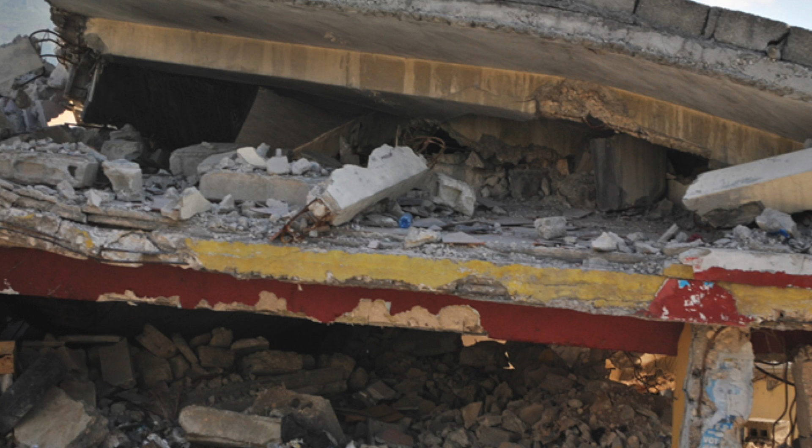Among that devastation was the Ecole Lakay Trade School, located near the capital of Port-au-Prince.

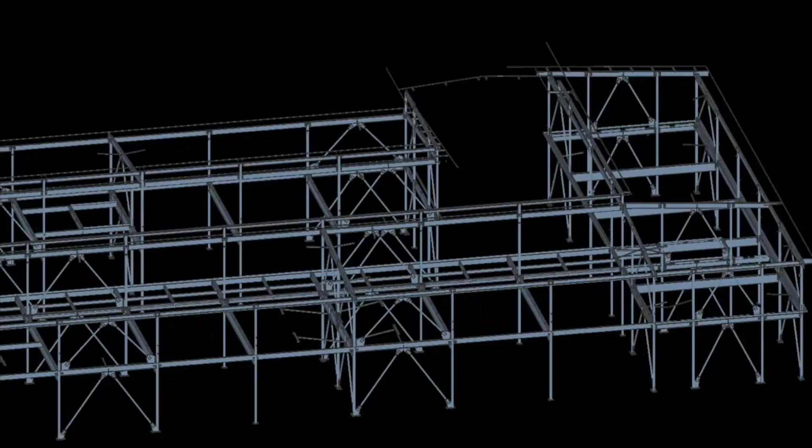Through their generosity, initiative, and collaboration, CISC members and associates helped to plan and build a new and improved 2,200 square meter facility that will specialize in training the next generation of skilled tradespeople in Haiti.

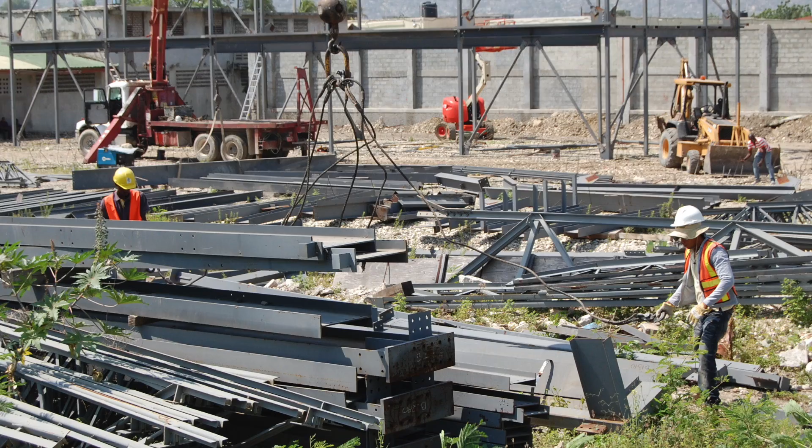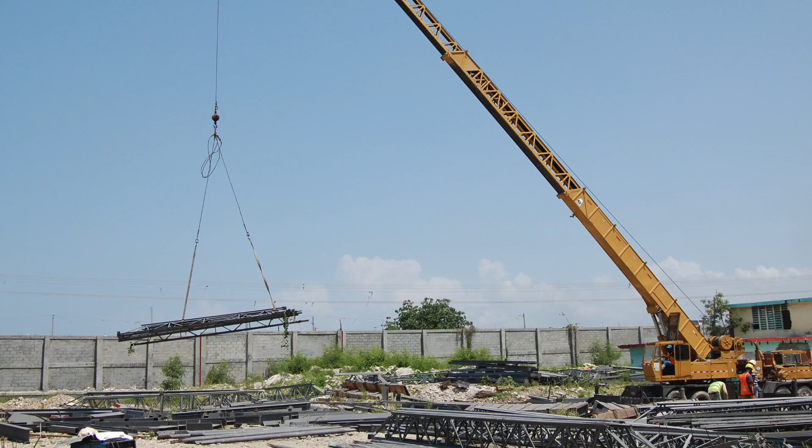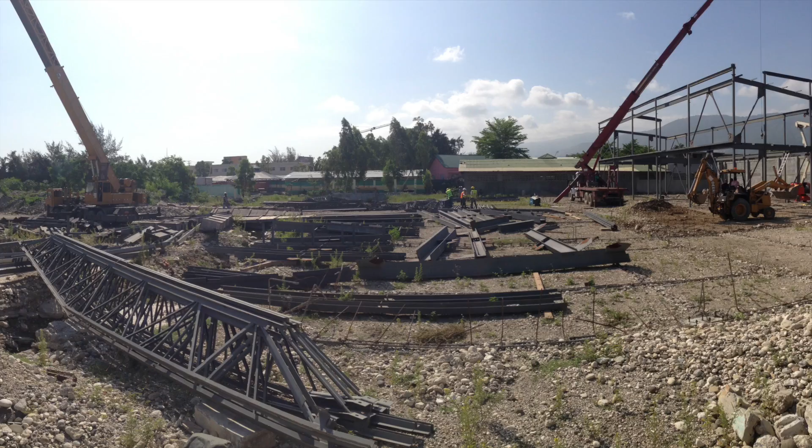The project started in the spring of 2011. CISC donated and fabricated over 140 metric tons of structural steel valued at over $1 million for the new school's construction.

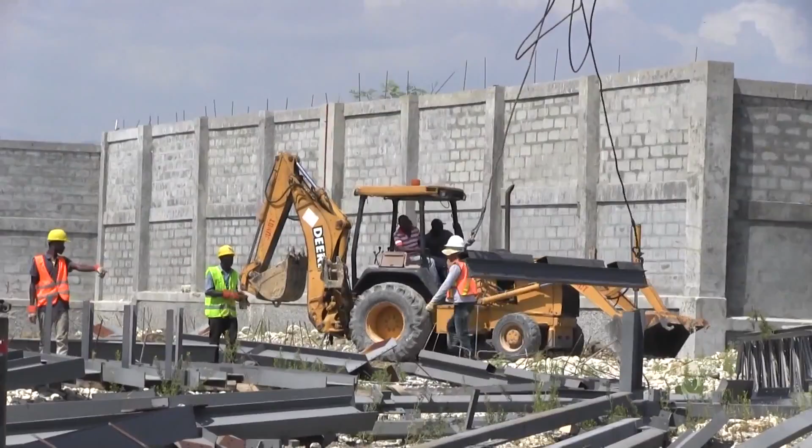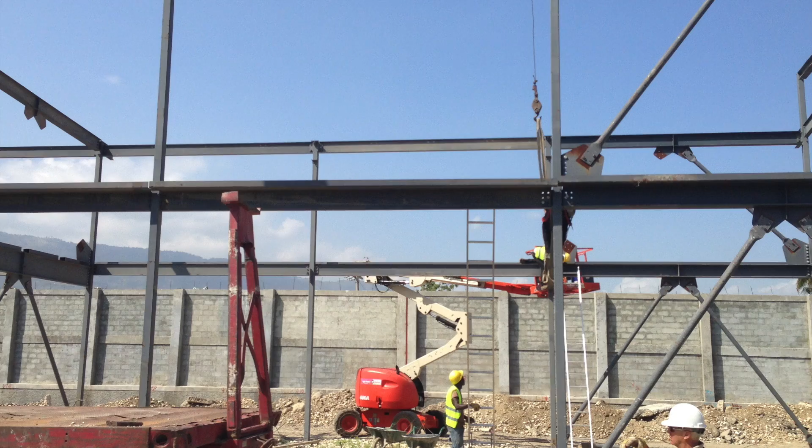As of May 2015, the erection of the structural steel frame of the school had been completed.

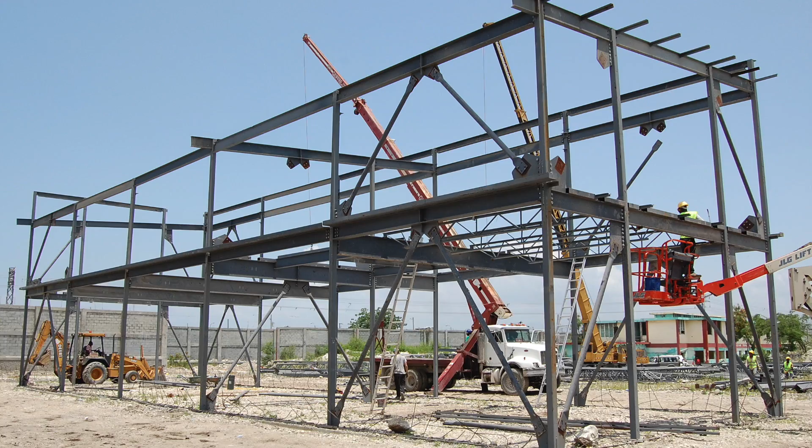In the fall of 2011, the CCA and the Quebec Construction Association approached the CISC and said, "We need your help on the Haiti school project." I knew if CISC did not get involved, this project would never go ahead. Our members and associates felt as well as I did that this struck a chord. We needed to get involved. And we didn't believe that it would be too much or too onerous.

When we notified the CCA and ACQ that we were interested in getting involved and would help out such a great humanitarian cause, the structure and the design, for a number of reasons we weren't aware of, changed entirely to structural steel. After the design drawings came back of the redesign, we went from approximately 20 metric tons up to, at the completed end, well over 145 metric tons of structural steel, joists and deck, and steel materials, which, as you can see, is a dramatic increase.

And without the willingness and the heart of the steel industry and the generosity, we wouldn't have been able to succeed in this project. One of the things that became quite evident as we were going along in the donation drive was that many companies were willing and eager across Canada to help on this project.

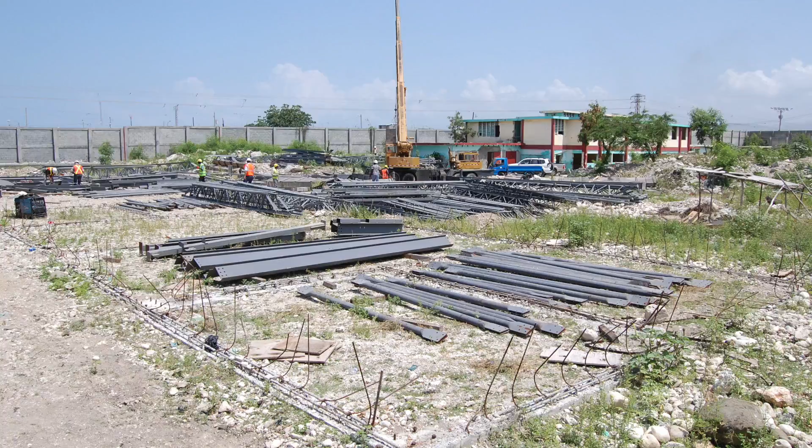The biggest challenge we had, and we knew that without the supply of the raw material of steel, this project was not going ahead. There were many companies that were willing to donate labor and their expertise, but we needed steel. And so it took almost 1 year after the board of directors approved this project for us to have a steel mill come on board, and actually 2 steel mills, to donate generously for this project. With that generosity from the steel mills, I knew we had a project.

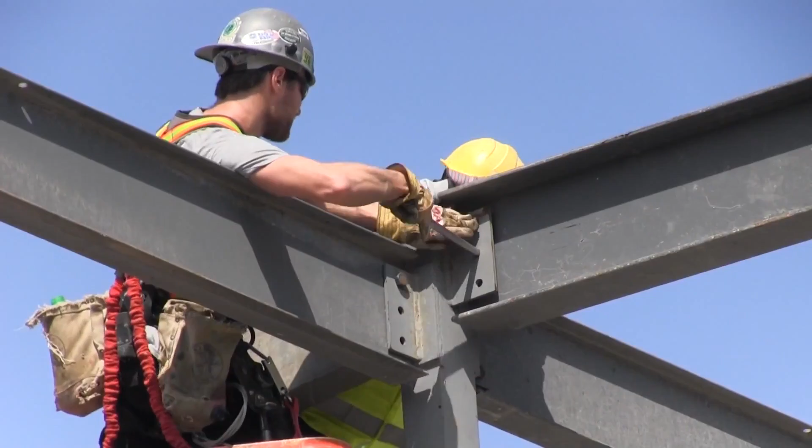The beautiful thing about this project is that it actually gives back to Haiti. We thought, wouldn't it be wonderful not only to come down and do it right, but to help educate the labor, the construction community in Haiti, and show them how to build safe, how to build to Canadian standards, and how to install and erect a steel building.

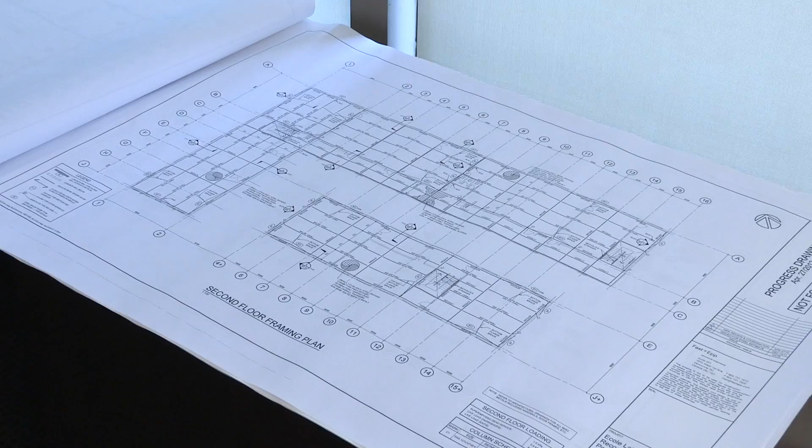Fast + Epp engineering team provided their knowledge and expertise to complete the engineering design for this project and selected steel for its versatility, durability, and seismic-resistant properties.

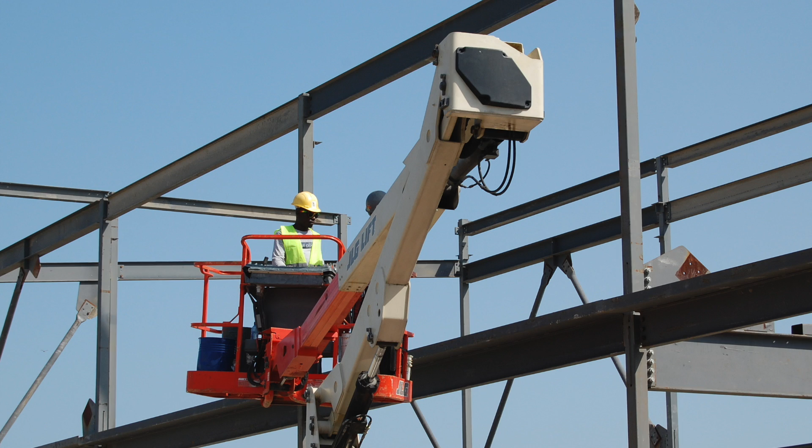Using steel for the primary structural frame provides the trade school with a robust and seismically dependable solution.

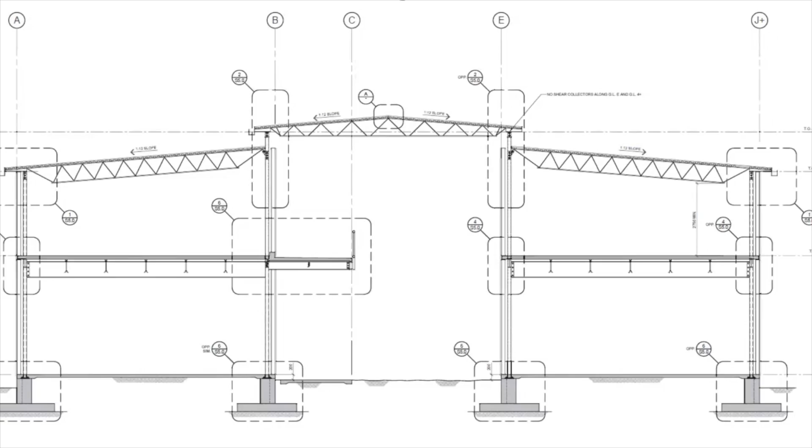At first, the school looked like a simple 10,000 square foot project, but by the time we received the construction drawings, the school had grown to a 17,000 square foot building that has so many braces that I believe the building could stand without any columns.

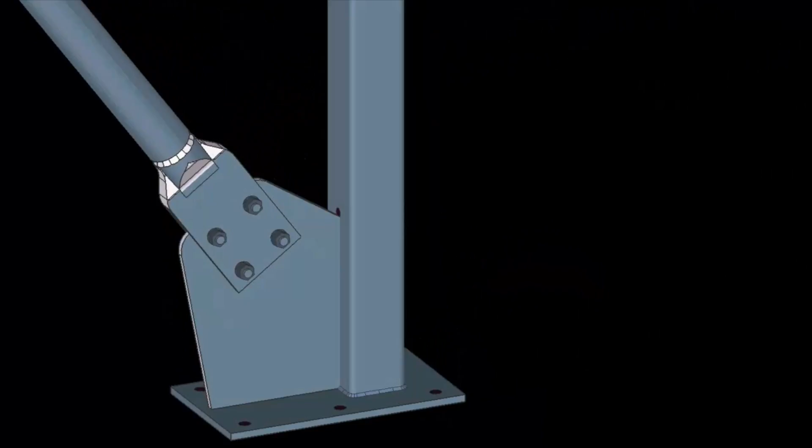This school has been built with the highest Canadian standard and all seismic requirements for the area. In a country like Haiti, which stands on two seismic fault lines, the steel structure was the way to go. By applying the Canadian code to Haiti-specific conditions, we've built a stronger school that will resist all earthquakes.

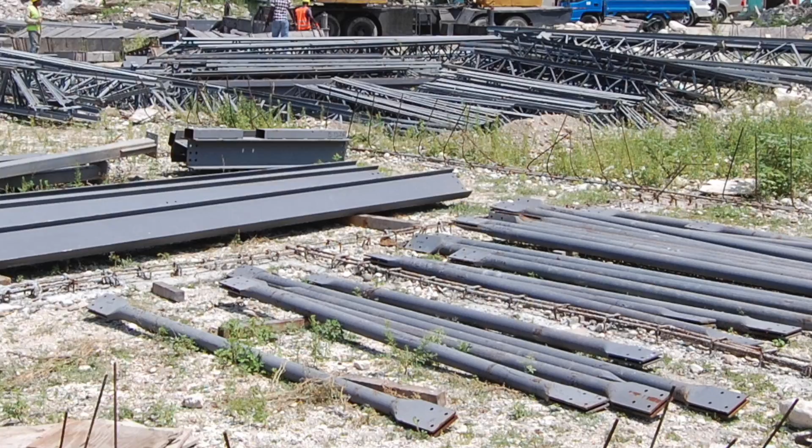At first, when we decided to help in this project, we had planned to produce during our down period, but it never happened this way. In fact, after receiving the steel donation from different suppliers, we were now in our peak period and we had to produce the job in overtime and even load the container between Christmas and New Year's to meet the schedule.

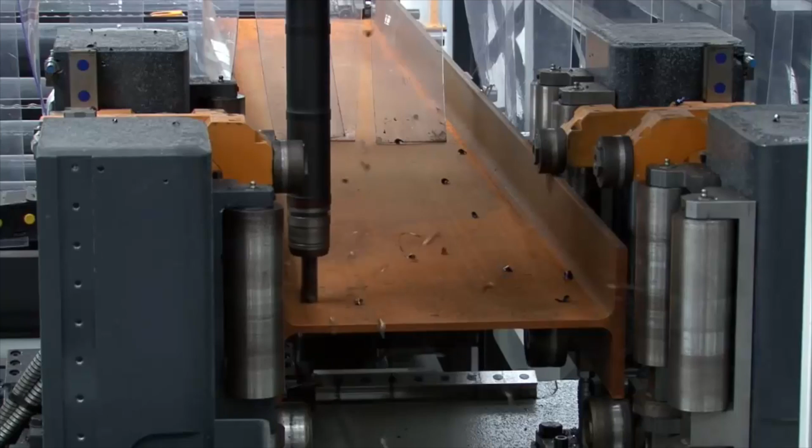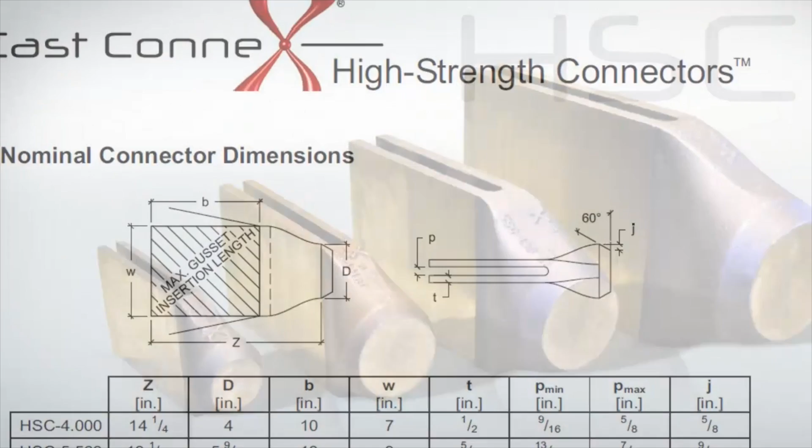Now that the Ecole Lakay steel structure is completed, we can see that all our time and effort was well worth it. With that many bracing, moment connections and complex designs due to seismic load, another challenge for us was to make sure that even with all these complex connections, the erection would be feasible. Obviously, we did encounter some erection puzzles that we managed to avoid and solve.

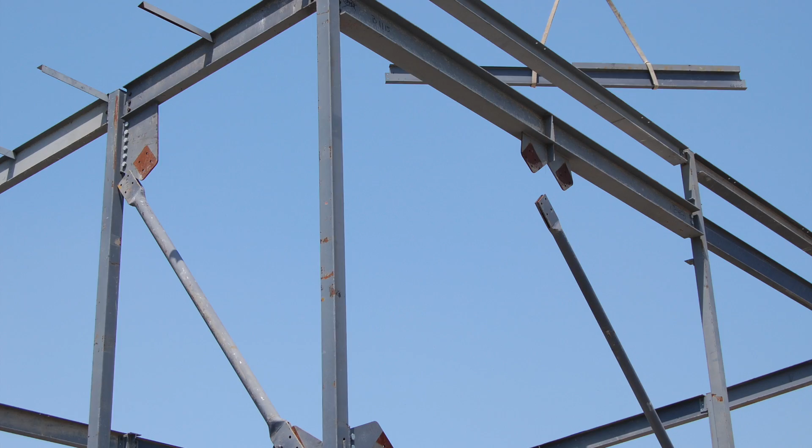Cast Connex provided high-strength connectors, which improved the overall performance of the building should another earthquake occur.

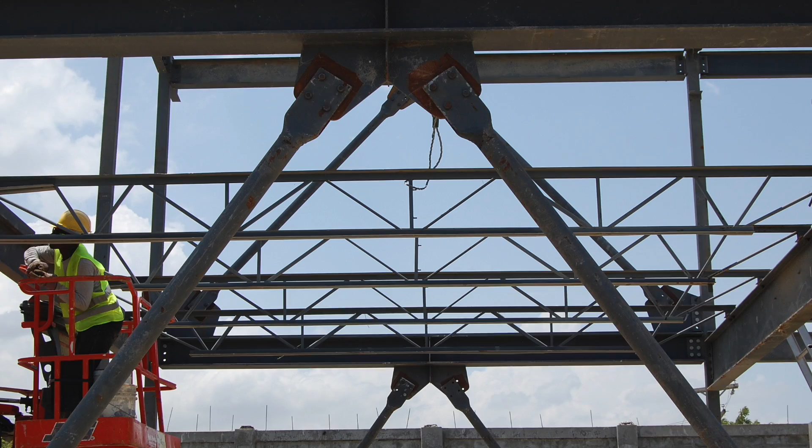Cast Connex is proud to have played a role in the reconstruction of Ecole Lakay in Haiti with our donation of 170 of our high-strength connectors.

Our high-strength connectors also improve the performance of the building should another earthquake occur. Their use accommodates bolted connections, which are very compact. This reduces the size of gusset plates in the seismic force resisting system, and that's been shown to improve the performance of brace frame structures in earthquakes.

The connectors provided a tremendous advantage on this project. By eliminating field welding, the structure could be erected with relatively simple tools and simple skills. In a place like Haiti, there isn't a wide availability of welding equipment and skilled welders, and so by facilitating field bolting, we simplified the erection of this structure to a point where this project was possible.

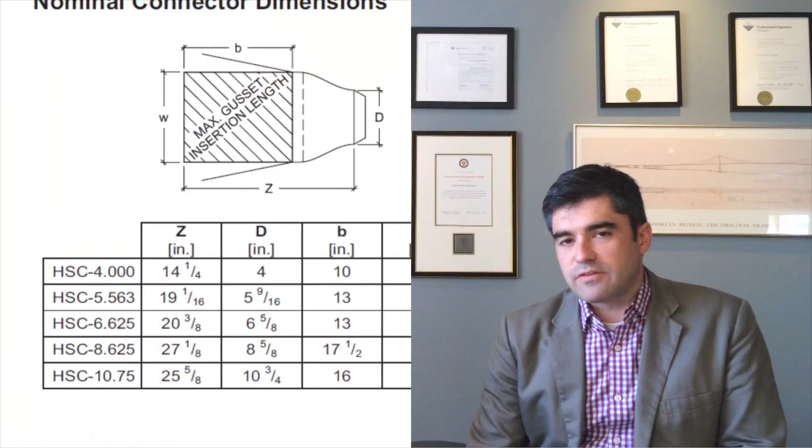It's a tremendous feeling to see technology that we developed at the University of Toronto being applied all the way in Haiti and facilitating the construction of a facility like this. This is why we do what we do.

For this project, Can-Am generously supplied 28,960 square feet of steel deck, 2 tons of joist girders, and 28 tons of steel joists.

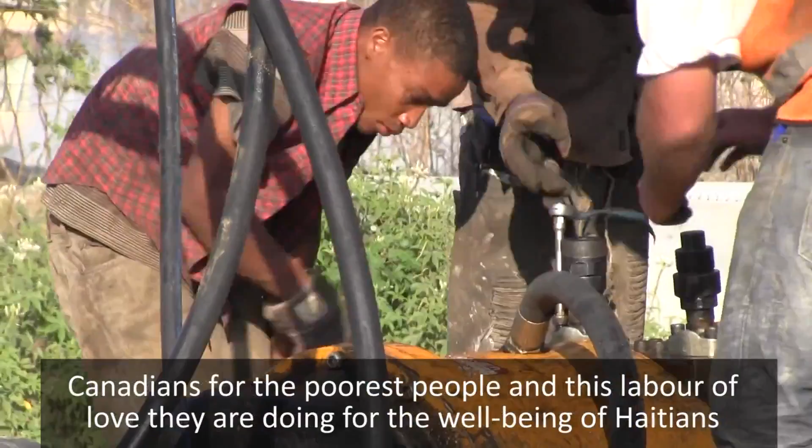We have to thank all time, so I say thank you and thank you again, because I think that will be a wonderful project in which there will be plenty of children that will have a better future. That's what we look for them.

I think that teaching 200 students at a time building skills, if they're then used properly by the local population, it's an immense benefit to Haiti.

The CISC would like to celebrate and recognize the members and associates involved in the Haiti school rebuild for their generosity, leadership, initiative, and vision.

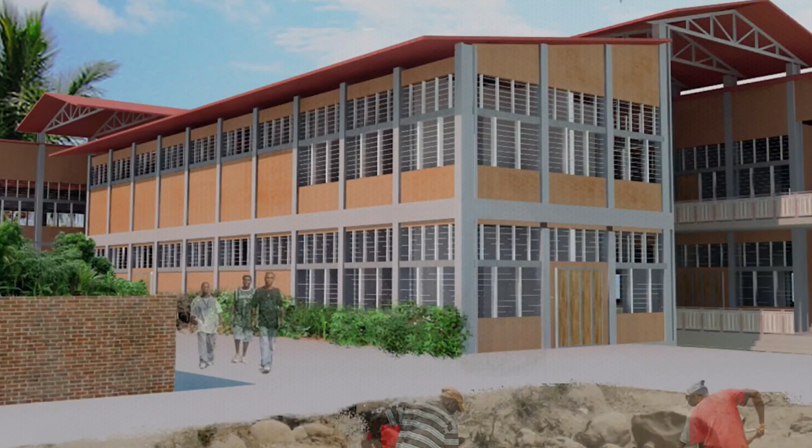We are proud to give the CISC Humanitarian Award to the project team for the Ecole Lakay Trade School Rebuild.